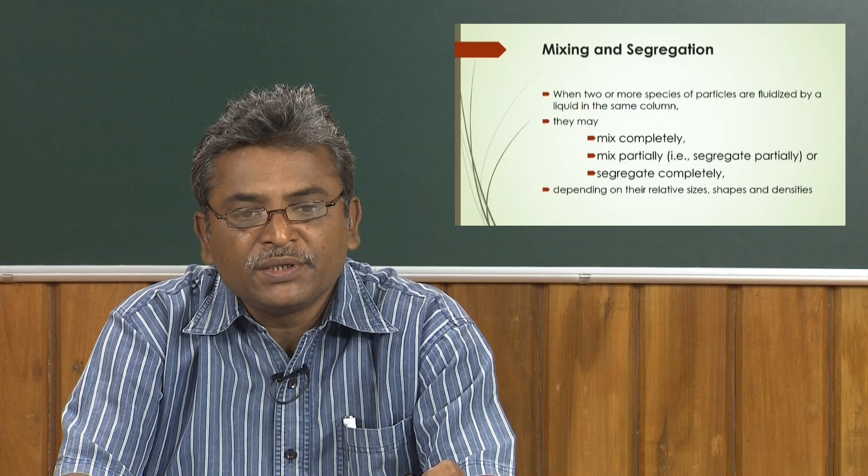So, when two or more species of particles are in fluidized condition, the mixing may be complete or partial, or the segregation may be complete, depending on the relative size, shapes and densities. And the segregation of the solids in liquid solid fluidization depends on the pressure gradient. In gas solid systems the pressure gradient will be lower; the pressure gradients will be higher in liquid solid systems, because here the frictional resistance at the wall will be more in case of liquid. So, the extent of segregation of the particles in liquid solid fluidized systems depends on the pressure gradient.

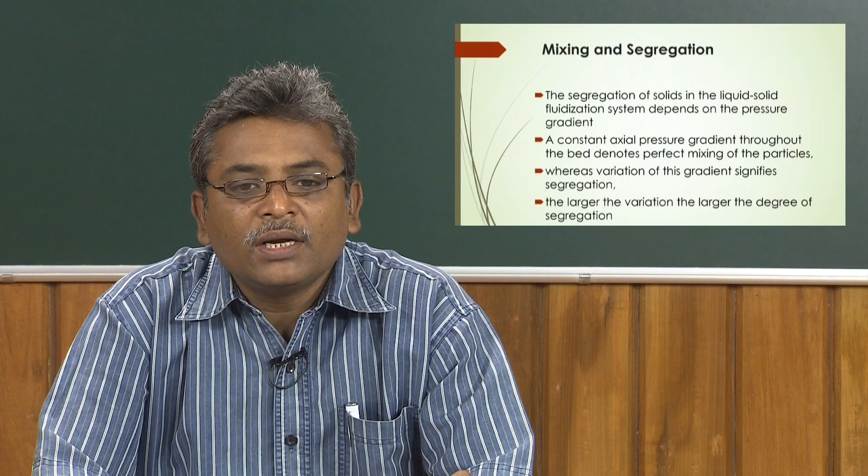And of course, a constant axial pressure gradient throughout the bed denotes perfect mixing of the particles, whereas variation of this gradient signifies segregation. The larger the variation of pressure drop or pressure gradient, the larger the degree of segregation in the fluidized bed in case of liquid solid system.

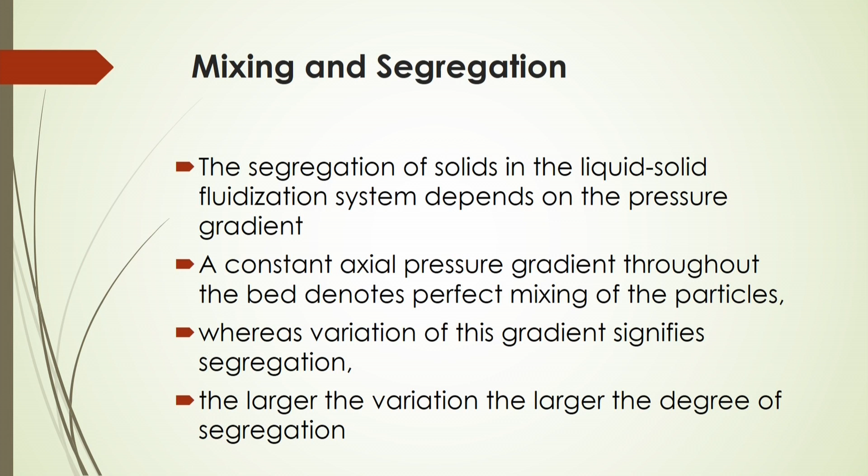So, first you have to calculate what should be the pressure gradient at a certain height of that fluidized bed. Up to that distance you have to calculate what should be the pressure gradient, and this pressure gradient of course will be the frictional pressure gradient. And also you have to calculate what should be the frictional pressure gradient for the whole fluidized medium. So, in that case the ratio will be represented by this m_z by M.

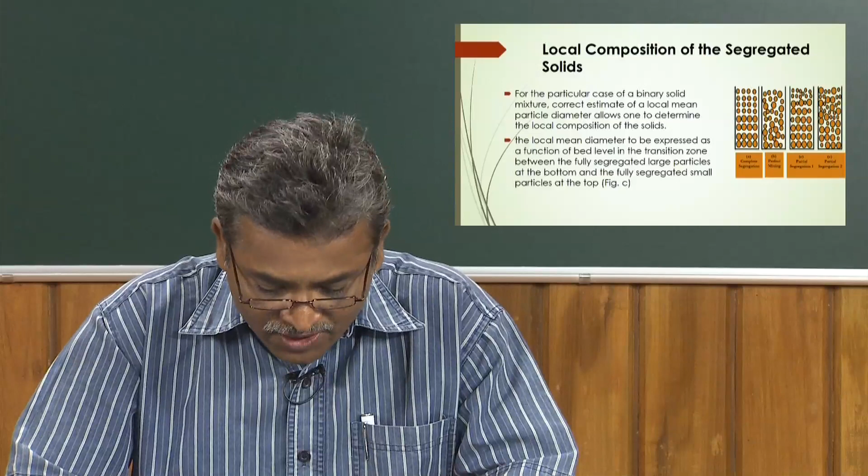We have already discussed in the gas-solid fluidization system that there will be two portions of the fluidized bed, bottom and top. The smaller particles will be segregated to the top, and at the bottom the coarser particles will be deposited as segregated solids. So, in these slides you will see how the solid particles are segregated from bottom to top. In figure A there is complete segregation.

See how the smaller particles are segregated from the coarser particles: the smaller particles are separated at the top region of this fluidized bed, whereas the coarser particles are deposited in the lower part. Whereas, if there is perfect mixing, smaller and coarser particles will be distributed throughout the column, and there will be no segregation.

In that case, smaller and coarser particles may not be separated into the bottom and top portions; smaller particles may also be at the bottom, and coarser particles at the top. So, the segregation depends on the mixing characteristics.

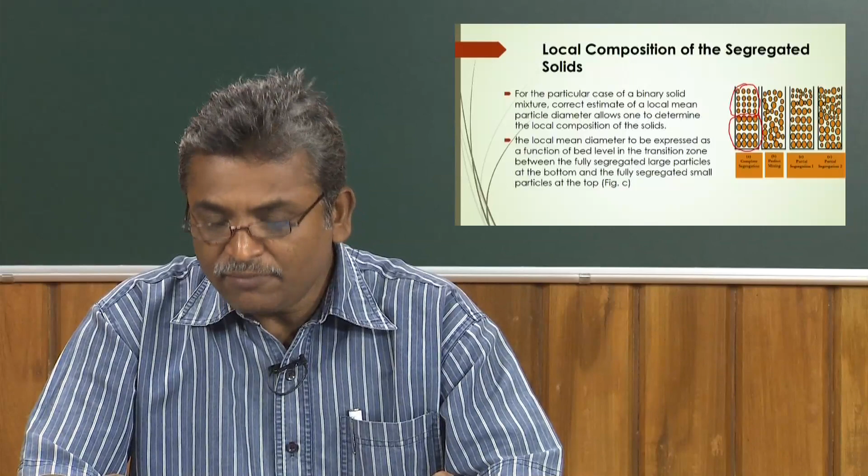Now, if higher mixing or higher flow rate is maintained inside the bed, you will not get 100% segregation. At a certain gas flow rate there will be complete mixing, where small and coarser particles are distributed throughout the column, and their concentrations are equally distributed, so you have to maintain a certain gas flow rate and pressure distribution.

With perfect mixing, the pressure gradient will not change along the height of the fluidized bed, whereas for complete segregation, the bottom part, a dense region of coarser particles, will show a higher pressure drop, while at the top portion the finer particles have higher porosity.

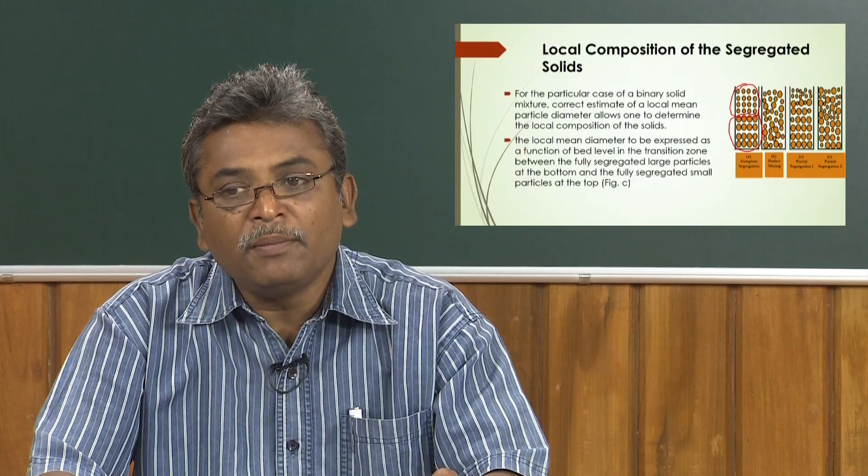In that case, that friction or pressure drop will be less compared to the perfect mixing there. Whereas in partial segregation, you will see that a very small amount of smaller particles will be residing at the bottom of this fluidized bed, whereas the maximum portion of the coarser particles will be residing on the bottom side, and a very small amount of coarser particles will be depositing at the top portion. So in partial segregation, some dilute concentration of the solid particles will be mixed in the lower part with the coarser particles.

In partial segregation, as you see in figure C, if you are increasing the flow rate and the energy distribution is so high, and also if you change the viscosity of the liquid, using a higher or lower viscous liquid, then you will see that there may again be some extent of mixing of the coarser and finer particles in the fluidized bed, and then the partial segregation will be there to some extent relative to figure C.

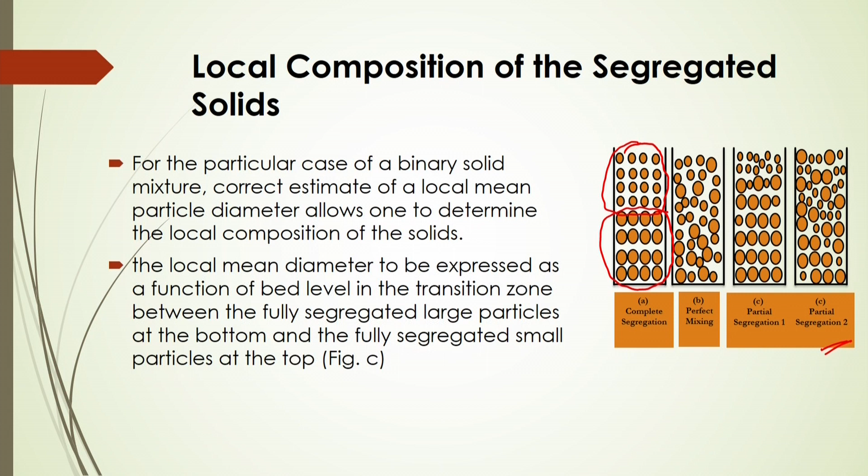So, very interestingly, whenever partial or complete segregation is there inside the bed, the local mean diameter will change across this column, and it can be expressed as a function of the bed level in the transition zone between the fully segregated large particles at the bottom and the fully segregated small particles at the top. So you have to know how the local composition of these solids will change based on the flow rate of the fluidized bed, and what extent of segregation can be obtained by this phenomenon.

And you can determine the local mean diameter using the axial voidage profile. During complete or partial segregation, the local voidage will change. At the top there may be higher voidage, whereas at the bottom there may be lower voidage. So, based on this axial voidage profile, Di Felice et al. 1987 suggested an empirical equation for calculating the local mean axial voidage by knowing the local mean diameter from this segregation phenomenon.

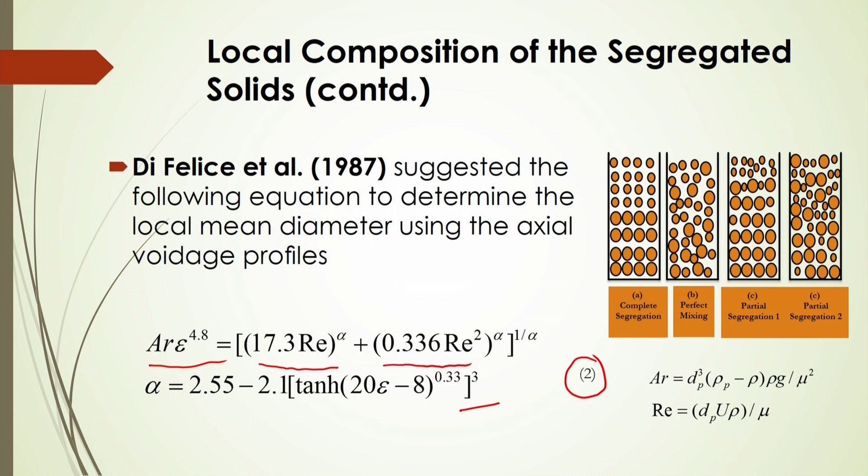So once you substitute alpha here, the porosity equation will be represented by equation 2, and by solving this nonlinear equation for porosity while changing the velocity, the particle density, the liquid density, and other variables, you will be able to calculate the porosity at different levels. And the local composition of the segregated solids will also vary along the axis of this fluidized bed.

So, irrespective of the degree of segregation or mixing, the overall bed expands as simply the sum of the individual species, each acting independently of the other, per Epstein et al. 1981. So, irrespective of the degree of segregation or mixing, how much the overall bed expands based on the voidage inside the bed depends on the number of individual species, and each species acts independently of the other.

So this 1 minus epsilon means the volume of the solids inside the bed, which depends on the local or overall volumetric concentration in the liquid of particle species I. So, if the concentration of particle species I is C I, then it will be C I by C T divided by 1 minus epsilon I, and if you sum these up for the n number of species of different particles inside the bed, then you will be able to calculate the overall bed expansion based on the concentration of particle species I.

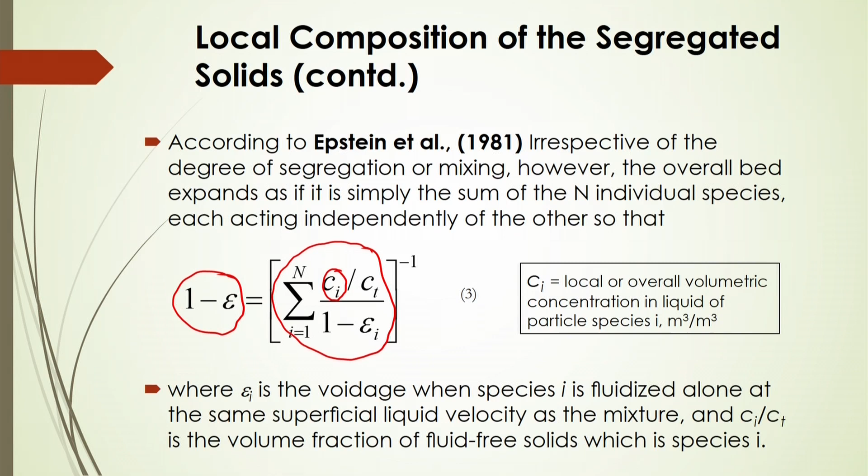And epsilon I is the voidage when species I is fluidized alone at the same superficial liquid velocity as the mixture, and C I by C T, given in equation number 3 here, is the volume fraction of the fluid-free solids for species I.

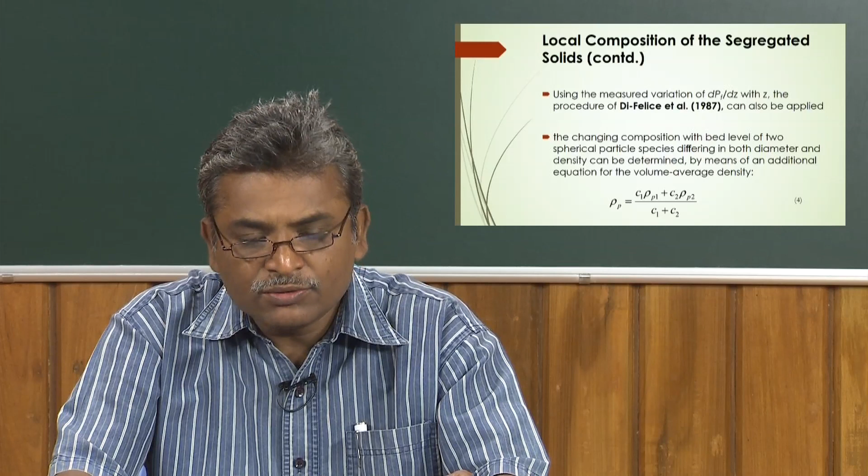Now, using the measured variation of the frictional pressure gradient with height of the column, the method procedure given by Di Felice et al. 1987 can also be applied here by changing the composition with bed level of two spherical particle species, and those species will of course differ in both diameter and density. So, if the spherical particle species differ in size and density, then you can calculate the density of the particles by means of an additional equation of the volume average density.

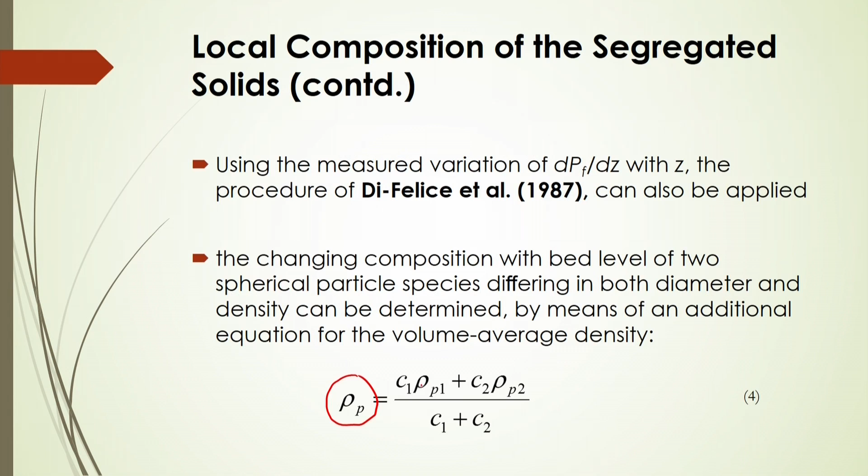So, this average density of the particles inside the bed will be equal to C 1 rho P 1 plus C 2 rho P 2 by C 1 plus C 2. So, here you can calculate the volume average density like this by equation 4.

Now, what are the phenomena involved in particle mixing and segregation? In the case of a size difference alone, the larger particles will always separate to some degree below the smaller under the following conditions. So, size difference is one condition, and bulk circulation or hydrodynamic instability. So, the larger particles separate to some degree below the smaller unless the size difference is small enough.

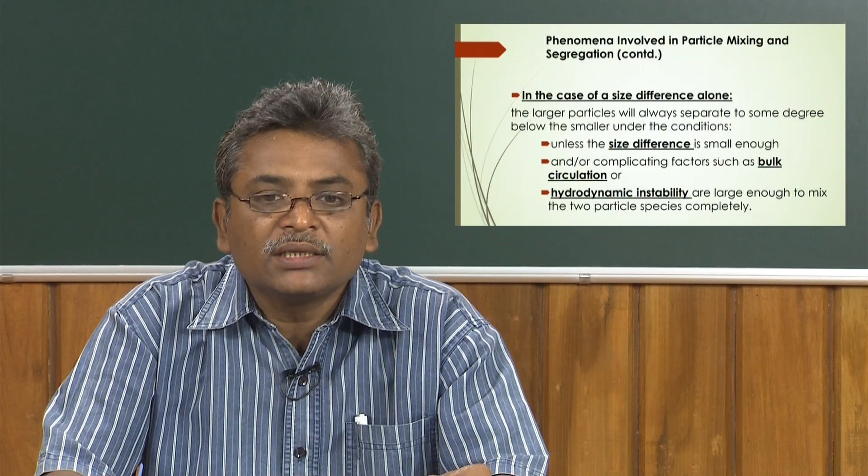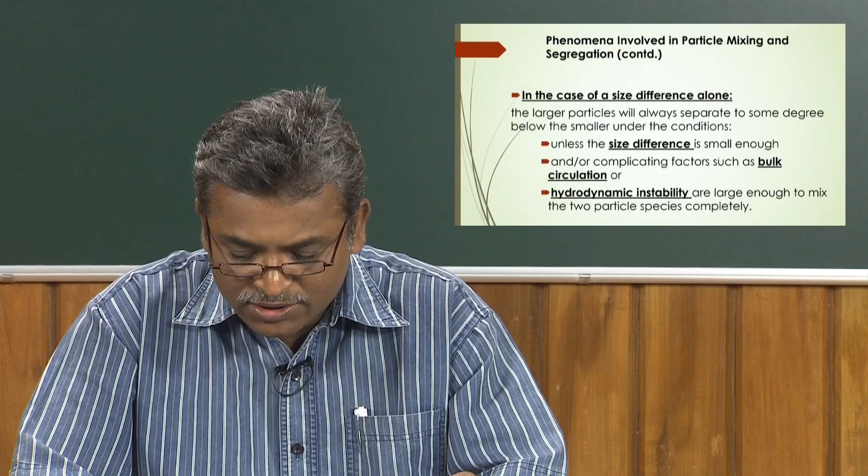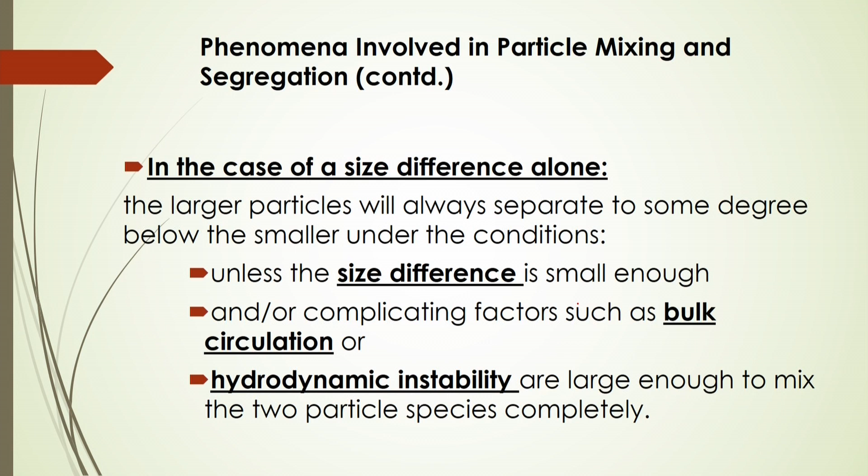And it is also seen that complicating factors such as bulk circulation will govern the degree of segregation based on the size difference. Also, there will of course be hydrodynamic instability; the flow pattern inside the bed may change, and because of that the segregation pattern and the mixing will also change. And hydrodynamic instabilities may be large enough to mix the two particle species completely in the bed.

Now, if there is a shape difference, what will happen? Sometimes particles of different shape will be inside the bed. The species with the larger magnitude of the product phi dp, where phi is the sphericity and dp is the particle diameter, will generally segregate below. And if there is a particle density difference in the same direction as that of phi dp in the previous case, the segregation will be accentuated.

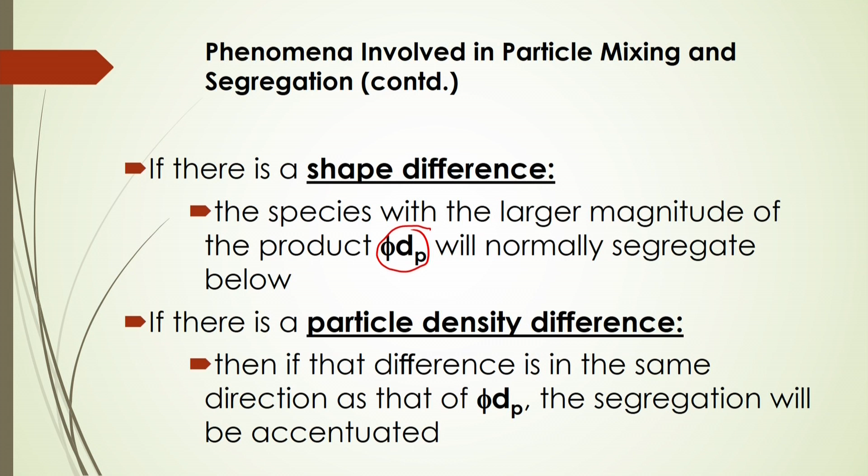And the phenomena involved in particle mixing and segregation also depend on the density difference of the particles and the voidage inside the bed. If the density difference is in the opposite direction, then depending on the magnitude of this difference, the segregation may be attenuated throughout the entire voidage range as the liquid velocity is increased. It may sometimes reverse over the entire voidage range, or it may be reversed at the lower voidage and attenuated at the higher, depending on the fluid density.

The last situation is the interesting bed inversion phenomenon. So, sometimes the bed will invert its segregation of the particles inside it. That totally depends on the diameter, the flow rate, and the fluid properties of the system.

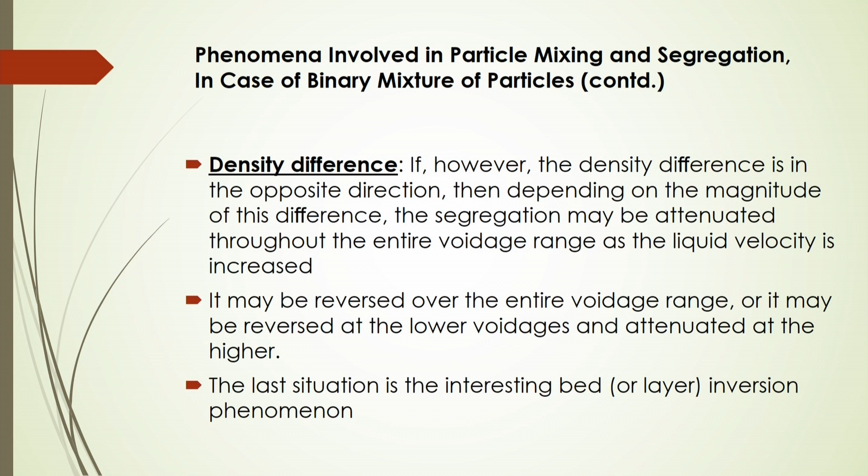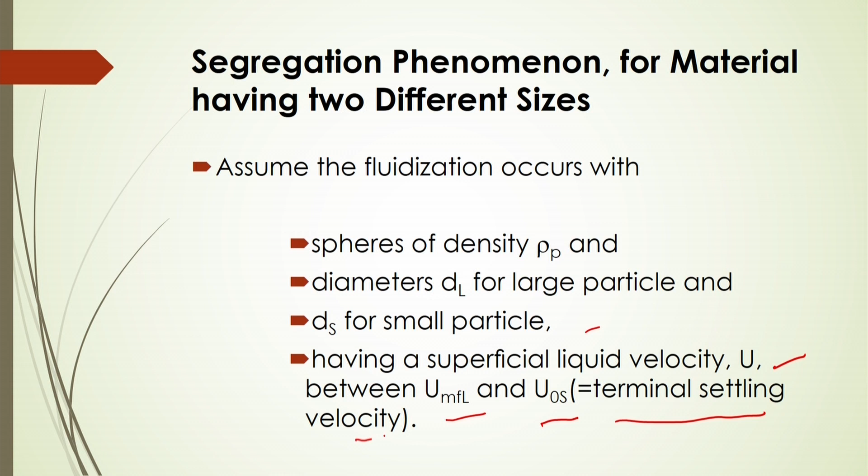Now, how can this segregation phenomenon for material having two different sizes be quantified? Let us consider fluidization of spheres of density rho p with diameter dl for large particles and diameter ds for small particles, having a superficial liquid velocity u between umf L and u 0 s. u 0 is the terminal settling velocity for the particle of smaller size.

And in the absence of smaller particles, the fluidized bed suspension density is calculated based on equation 5 here. In this case, the fluidized bed suspension density will be equal to rho p, the density of the particles, into 1 minus epsilon L.

1 minus epsilon L is nothing but the volume fraction of the larger particles there, and then density of the liquid into epsilon L is the porosity of this only liquid volume fraction there. And in the absence of larger particles, the suspension density will be given as rho p into 1 minus epsilon s plus rho into epsilon s here.

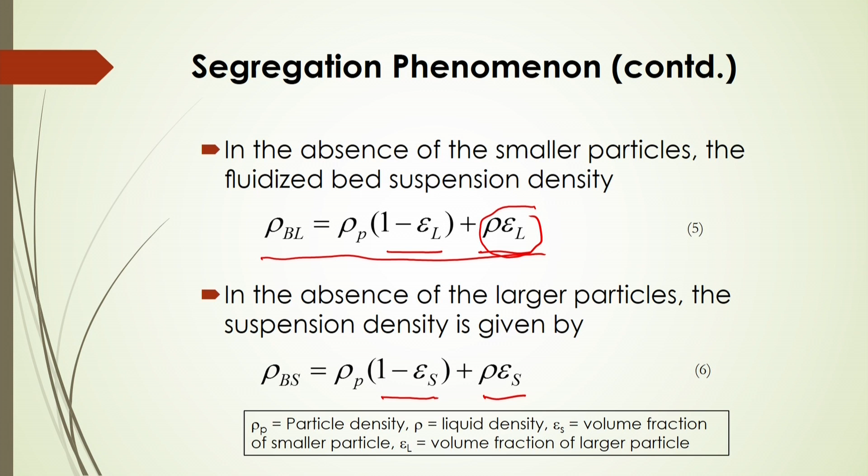So, epsilon L and epsilon s are the volume fractions of the larger particles and smaller particles in the bed. If you know these volume fractions, then what should be the suspension density based on the larger and smaller particles? Rho p is the particle density, rho is the liquid density, epsilon s is the volume fraction of smaller particles, epsilon L is the volume fraction of larger particles, by which you will be able to calculate the fluidized bed suspension density by equations 5 and 6 shown in the slides.

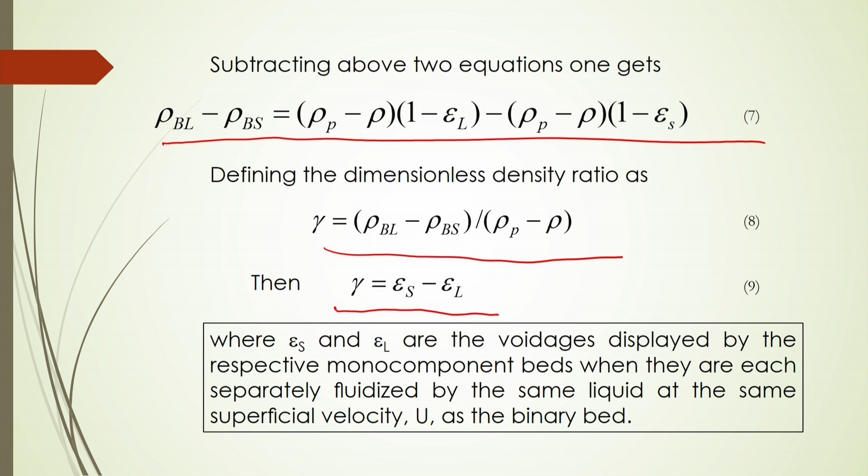Now, if you subtract equations 5 and 6, you can simplify it as equation 7, and defining the dimensionless density ratio by equation 8, you can represent this as gamma is equal to epsilon s minus epsilon L, where epsilon s and epsilon L are the voidages displayed by the respective monocomponent beds when they are each separately fluidized by the same liquid at the same superficial velocity u as the binary particle bed mixture.

As per Richardson–Zaki 1954, they developed a correlation for this gamma applied for the monocomponent beds. They have given epsilon s is equal to epsilon L into (dL by ds) to the power (3 minus m) by mn, where m and n are parameters that depend on the other properties of the fluid. The index n in equations 10 and 11 can be calculated by equation 12: (4.8 minus n) by (n minus 2.4) equals 0.043 into Archimedes number to the power 0.57.

Now, n can be calculated from equation 12, whereas m depends on the fluid flow condition, whether high velocity or low velocity, that means the regime: sometimes laminar, the Stokes regime, and sometimes the Newtonian regime. So, that varies based on the fluid flow condition.

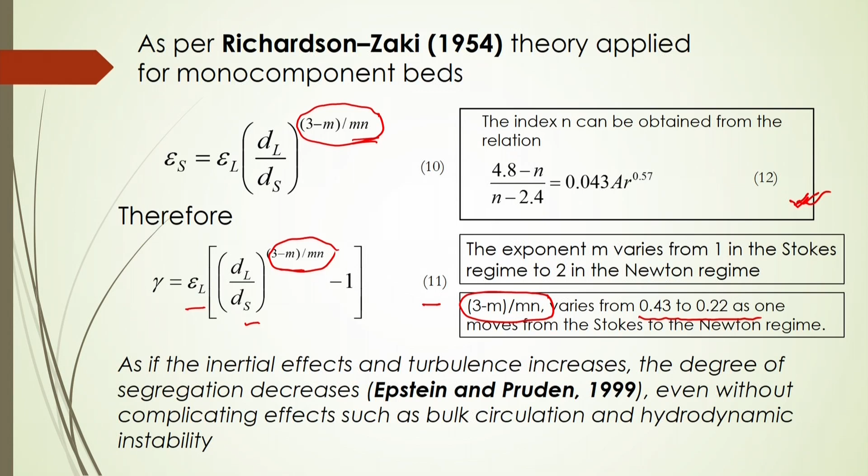As the inertial effects and turbulence increase, the degree of segregation decreases, as given by Epstein and Pruden 1999 in their article. Even without complicating effects such as bulk circulation and hydrodynamic instability, inertia effects and turbulence will change, and because of this the segregation and its degree will be affected.

Now, a qualitative measure of the degree of segregation is given by Epstein and Pruden, and the value of gamma may function as a crude qualitative measure of particle segregation as follows. If gamma is less than 0.015, there will be little segregation and good mixing, as shown in figure B. If gamma is within 0.015 to 0.045, as in figure D, partial segregation with no interface between layers will happen.

Whereas, if gamma is between 0.045 and 0.1, there will be segregation with a fuzzy interface and some intermixing, as shown in figure C in the slides. And if gamma is greater than 0.1, there will be clear-cut segregation with a sharp interface and little intermixing, as shown in figure A in the slides.

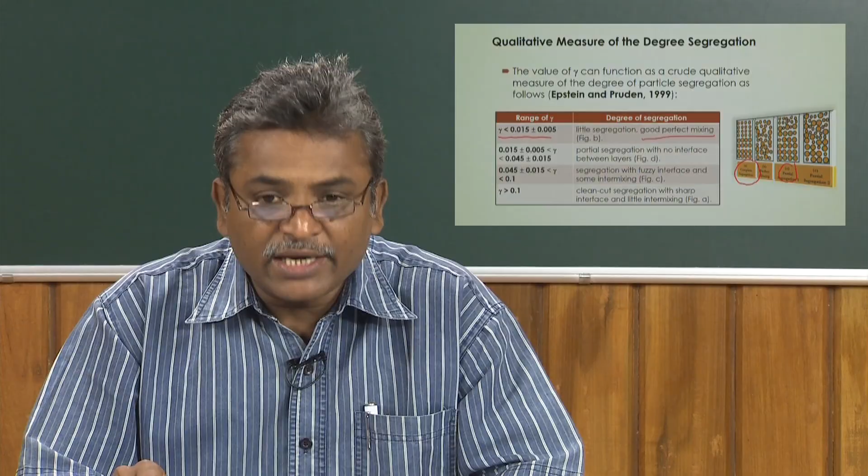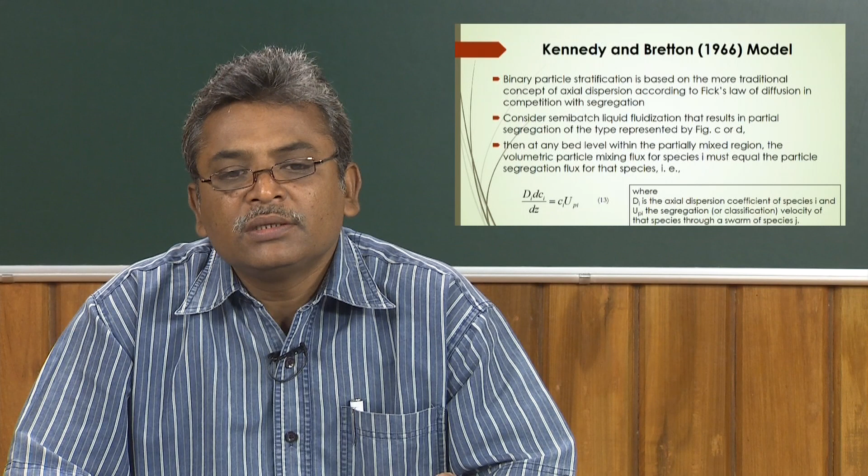Now, as per their model, if you consider a semi-batch liquid fluidization that results in partial segregation of the type represented in figure C and D in these slides, then at any bed level within the partially mixed region, the volumetric particle mixing flux for the species I must be equal to the particle segregation flux for that species. So, in that case equation 13 will be useful to interpret the axial dispersion inside the bed.

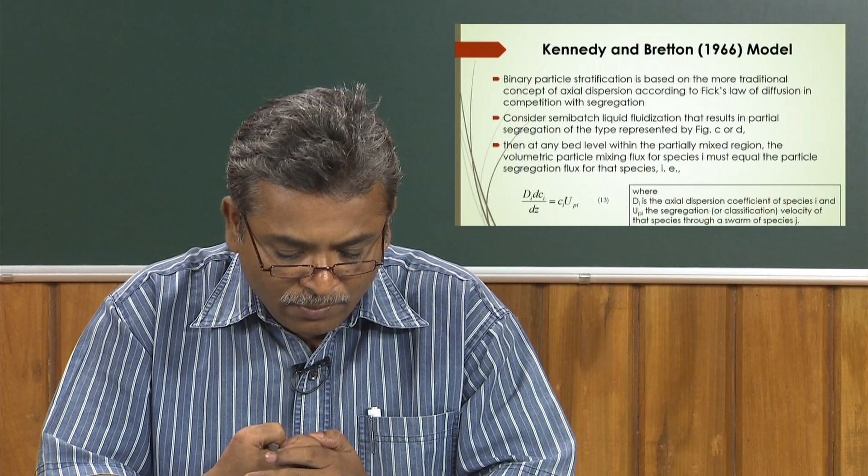Now, they have concluded that, as per Fick's law of diffusion, they have given equation 13, by which the concentration of that species with respect to z at steady state will depend on the particle flow rate there, or you can say the segregation velocity of the species through a swarm of species j in the mixture. So, in that case this proportionality constant will be expressed by the axial dispersion coefficient. So, based on their model this equation 13 can be explained here.

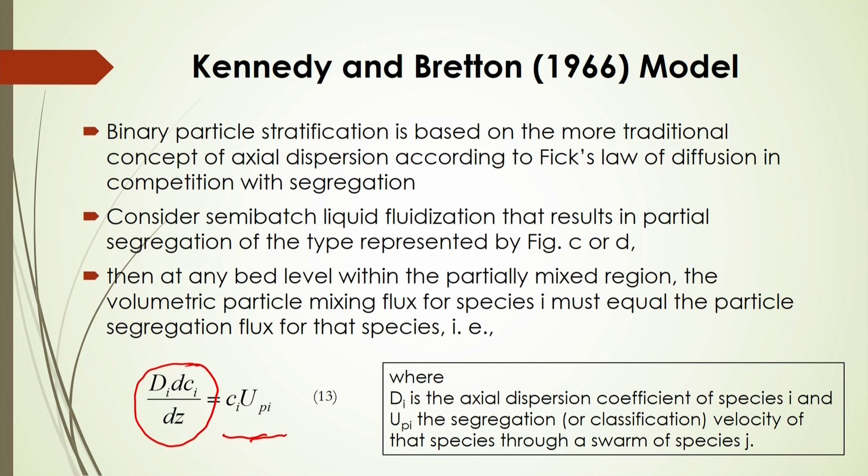So, D_I into dC_I by dz will be equal to C_I into u_pI. C_I is the proportionality constant, D_I is called the axial dispersion coefficient of the species I, and u_p here is the segregation or classification velocity of that species in the bed.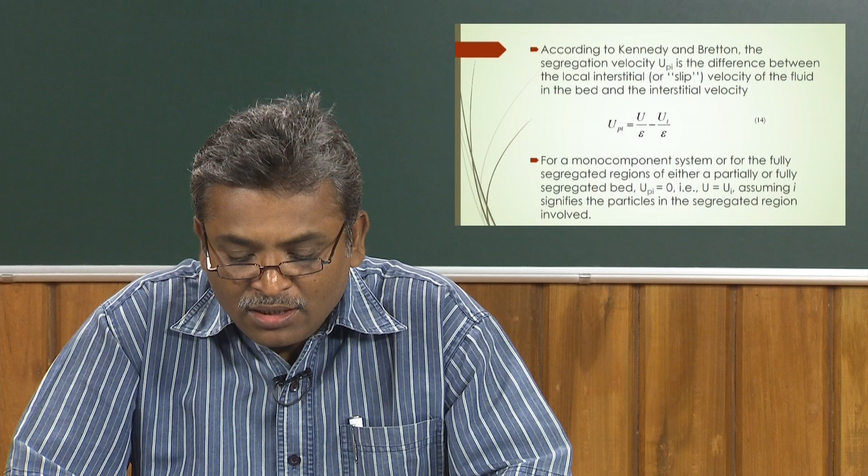Now, according to their model, the segregation velocity u_pI can be expressed by the difference between the local interstitial velocities, which will be equal to u by epsilon minus u_I by epsilon. So, u is the gas velocity and epsilon is the porosity. So, u by epsilon is the axial velocity of the gas, whereas in u_I by epsilon, u_I is the species segregation velocity and epsilon is the void inside the bed. So, based on this you can calculate the slip velocity, or relative segregation velocity, in terms of this axial or interstitial velocity.

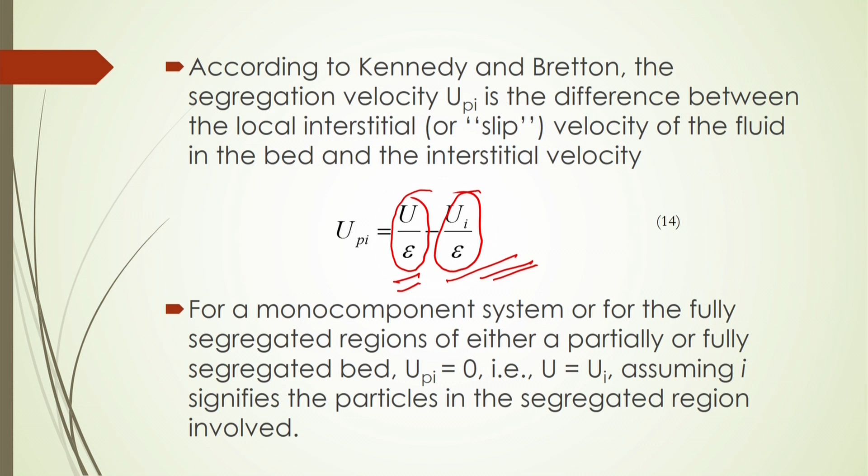So, for a monocomponent system or for the fully segregated region of either a partially or fully segregated bed, the u_pI value should be equal to 0, whereas u will be equal to u_I, that means the gas velocity will be equal to that individual species velocity. In that case you will see particles in the segregated regions of the bed.

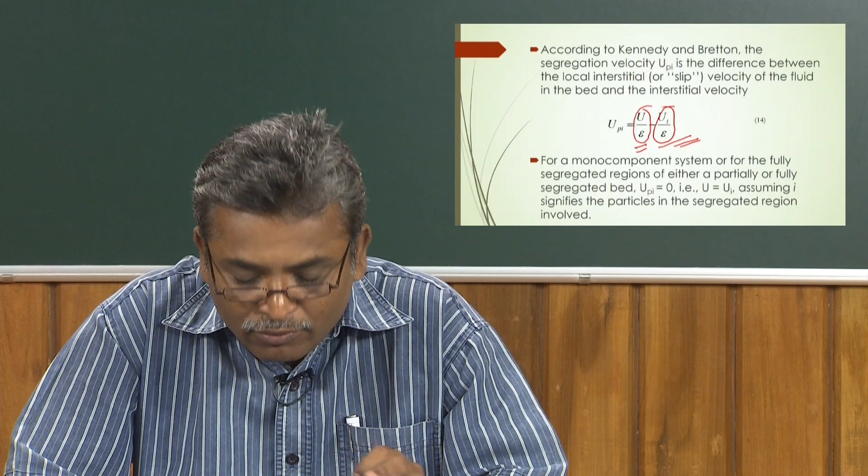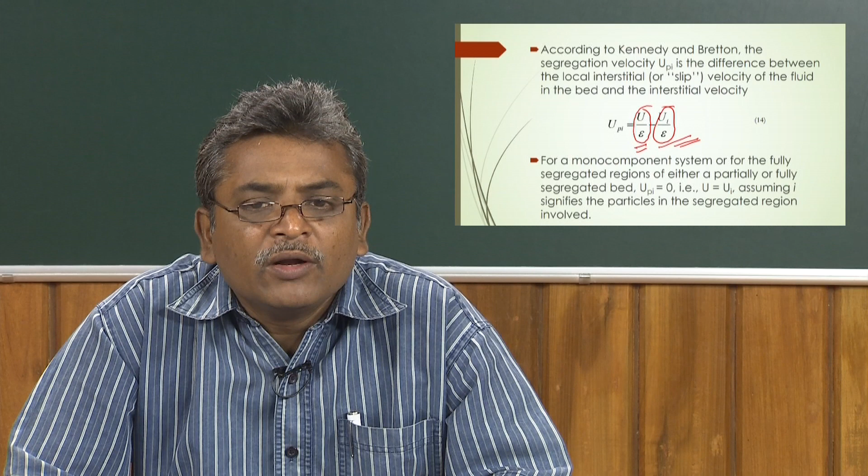So, in this case you will be expressing how that slip velocity will change the extent or degree of segregation, whether it is a partially or fully segregated bed or not. So, first you have to calculate the local slip velocity of that segregated particle. And substituting this u_I value in equation number 13, you will have the equation expressed by equation 15.

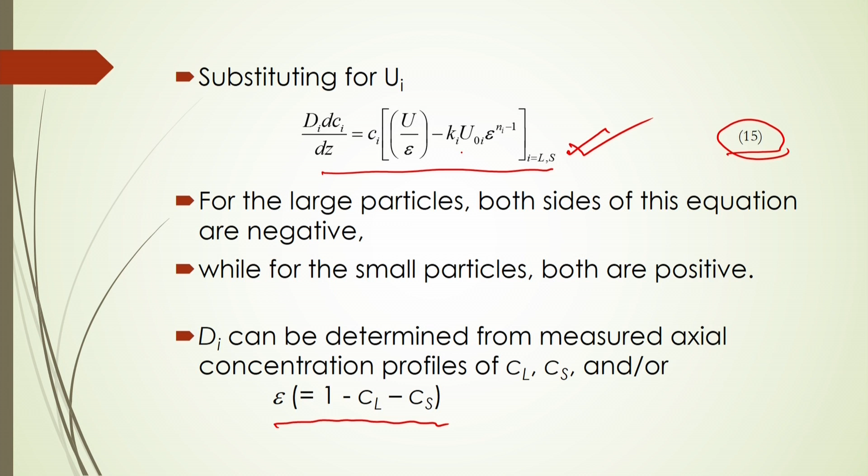And in this case for the large particles both sides of this equation are negative, whereas for the small particles both may be positive. So, D_I can be determined from the measured axial concentration profiles of C_L and C_S, with epsilon equal to 1 minus C_L minus C_S. So, based on equation 15, you will be able to calculate this axial dispersion coefficient D_I just by plotting the gradient of the concentration with u over epsilon inside the bed.

Now, Juma and Richardson 1983 have also given another equation to calculate the segregation velocity along the axis of the fluidized bed, and they have given this equation: u p I is equal to a I plus b I into z. This a I and b I are parameters which are to be experimentally determined. Here I means L and S, that means large and smaller particles.

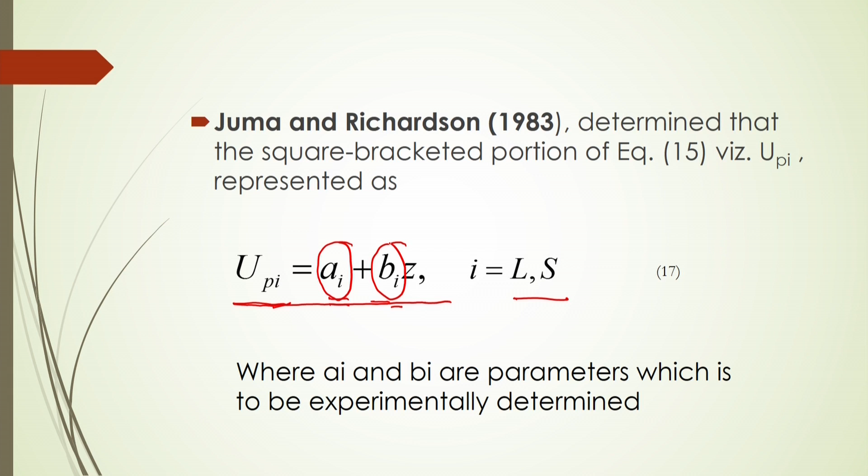So, for the larger particles, u p L will be equal to a L plus b L into z, and for smaller particles u p S is equal to a S plus b S into z. Now, if you are able to find out experimentally how this u p for large and smaller particles changes along z, then you can mathematically express the segregation velocity for large and smaller particles by equation number 17.

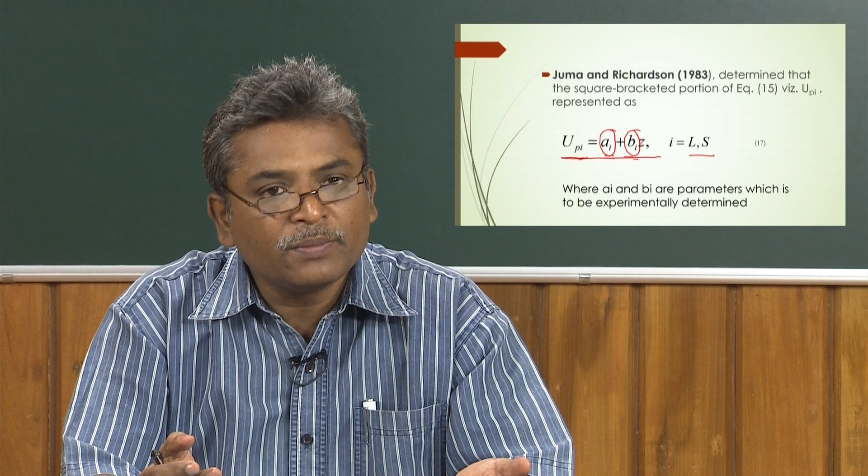From the experimental data you will be able to find out the parameters a I and b I for equation 17. Once you know these parameters, you can say what the predicted value of u p I will be for any operating conditions. Once you know this predicted segregation velocity for the large and smaller particles by equation 17, and substitute it, you will be able to find out the axial dispersion of the larger and smaller particles inside the bed for this binary mixture.

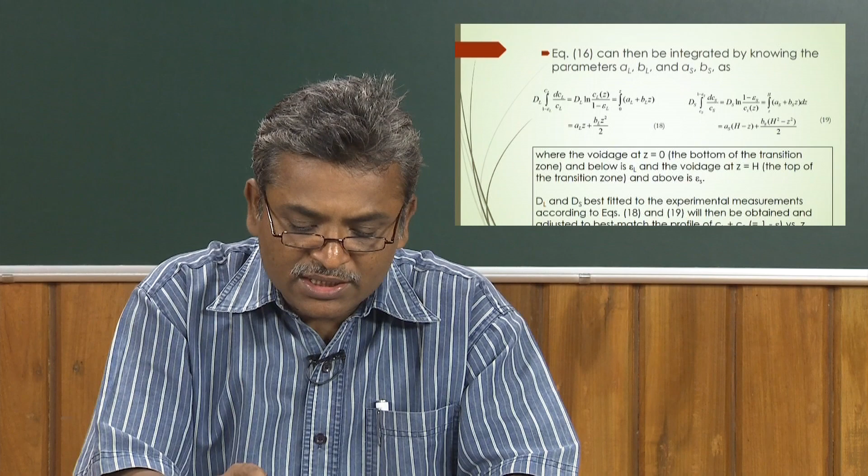Equation 16 can then be integrated by knowing the parameters a L, b L and a S, b S, and substituting you will get this type of equation, from which the dispersion coefficient for each individual component, the larger and smaller particles, can be calculated. Here it is important that the voidage at z equal to 0, the bottom of the transition zone and below, is epsilon L, and the voidage at the top of the transition zone and above is epsilon S.

Now, D L and D S are best fitted to the experimental measurements according to equations 18 and 19. You can obtain the value and adjust it to best match the profile of C L and C S, which equals 1 minus epsilon, versus the length Z of the fluidized bed. So from equations 18 and 19 you will be able to calculate the extent of dispersion of the large and smaller particles and how it changes along Z.

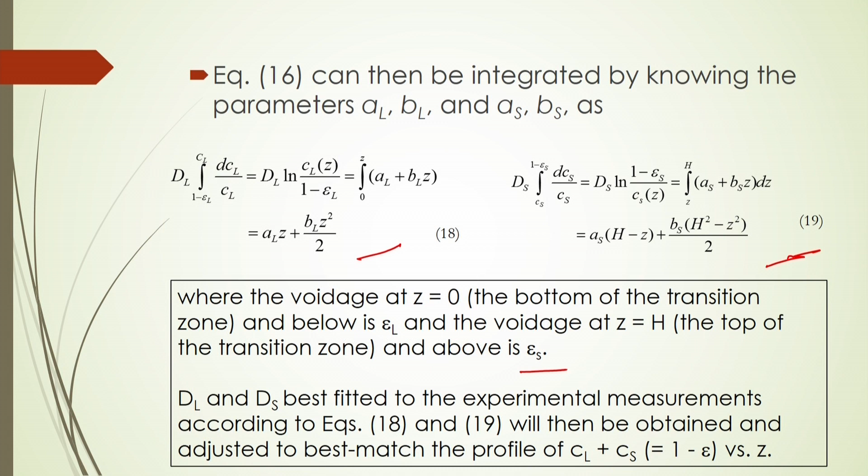Now, u p I varies linearly with C I, from 0 in a monocomponent bed of I particles, in which epsilon equals epsilon I and C I equals 1 minus epsilon I, to u p I 0 in a monocomponent bed of j particles, in which epsilon equals epsilon j and C I equals 0. So u p I is equal to u p I 0 into 1 minus C I by 1 minus epsilon I.

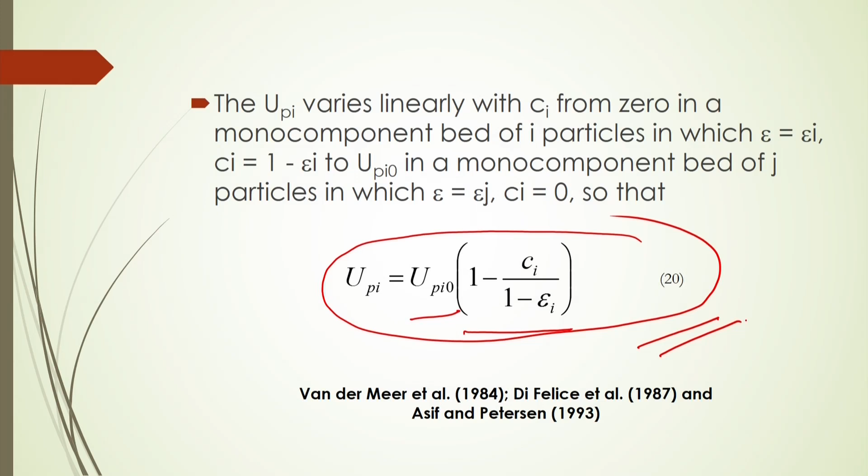This relation has been given by Van der Meer et al. 1984 and Di Felice et al. 1987. Also Asif and Petersen 1993 studied how the segregation velocity for the large and smaller particles changes with concentration, and they also suggested the same type of relationship with the concentration, which is expressed in equation number 20.

Now, substituting equation number 20 into equation 13, taking I equal to L for larger particles and the upward direction as positive, you will get equation number 21. After simplification of 21 you can express it, and if you integrate it, you can get the mass fraction of the large particles in terms of concentration. Then at Z equal to Z L, you can express this equation to predict the mass concentration of these particles along the axis of the bed.

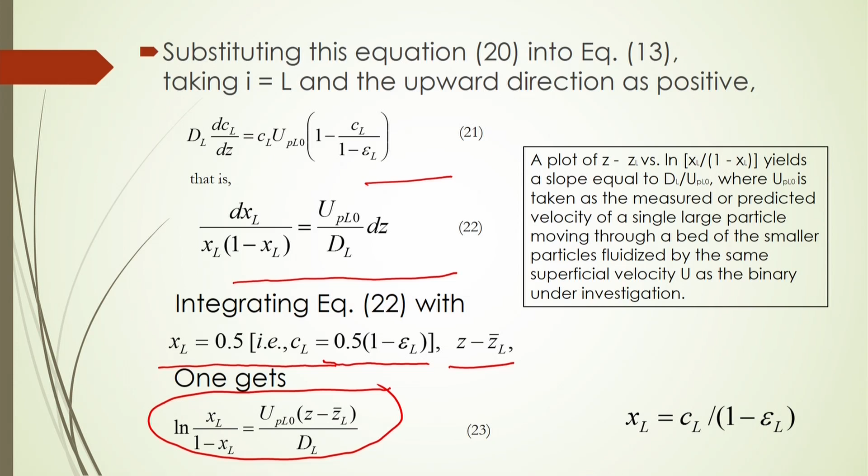Now, from equation number 23, it follows also that XL should be equal to this here, and it will be related to this Peclet number here. This Peclet number is denoted by the axial dispersion coefficient of these large particles. So, if you know the axial dispersion coefficient of the large particles, then you will be able to calculate the mass fraction of the larger particles in the bed, along with Z, that is, Z minus ZL by L.

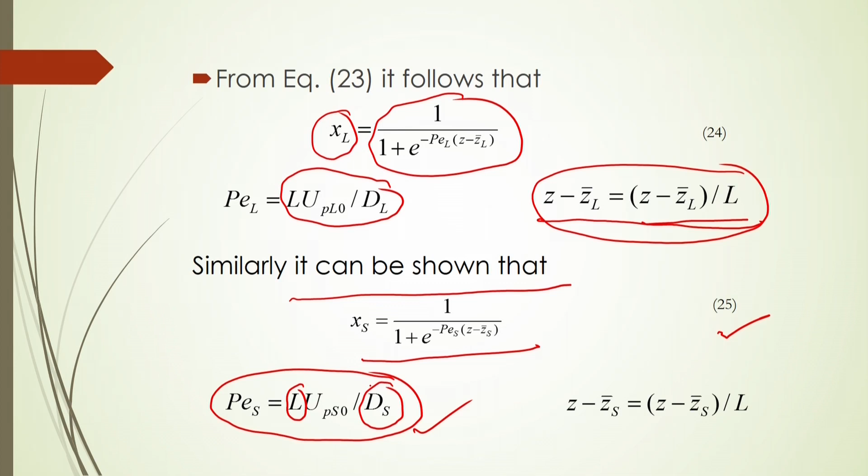Similarly, it can be shown for smaller particles also, XS will be equal to this, by knowing the dispersion coefficient for the smaller particles, which is expressed by this Peclet number in equation number 25, whereas the Peclet number of the small particles is defined by L, the length of the bed, into UPS0, the segregation velocity for these smaller particles, divided by the dispersion coefficient of the smaller particles.

Now, Di Felice et al. 1987 have also correlated CS and CL by the porosity of the smaller and larger particles by equation number 26. And if you substitute CS from equation number 26, then XS can be calculated in terms of XL by equation number 27. So, equation 27 comes after simplification by substituting the concentration profile for the smaller particles in terms of larger particles.

Now, comparing equations 25 and 27, you can simply say that the Peclet number of the large particles will be equal to the Peclet number of the smaller particles in magnitude, but opposite in direction, because the flow of the smaller and larger particles will be in opposite directions. And of course, the length of occupation of the larger particles inside the bed and of the smaller particles should be almost the same. So, at the middle of this fluidized bed, there will be a demarcation of the larger particles and smaller particles.

This happens if the Peclet numbers of the smaller and larger particles are the same, or you can say the dispersion coefficients of the larger and smaller particles are the same in the bed. And this happens only when the concentration of the smaller particles is based on this correlation with the larger particle concentration.

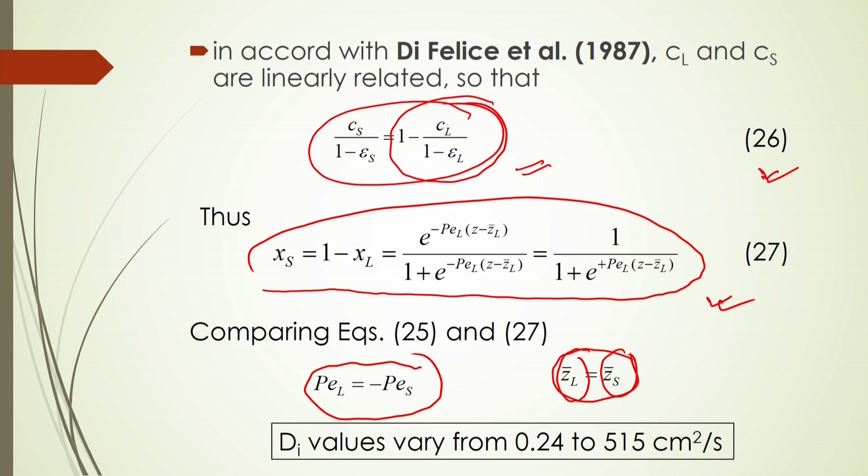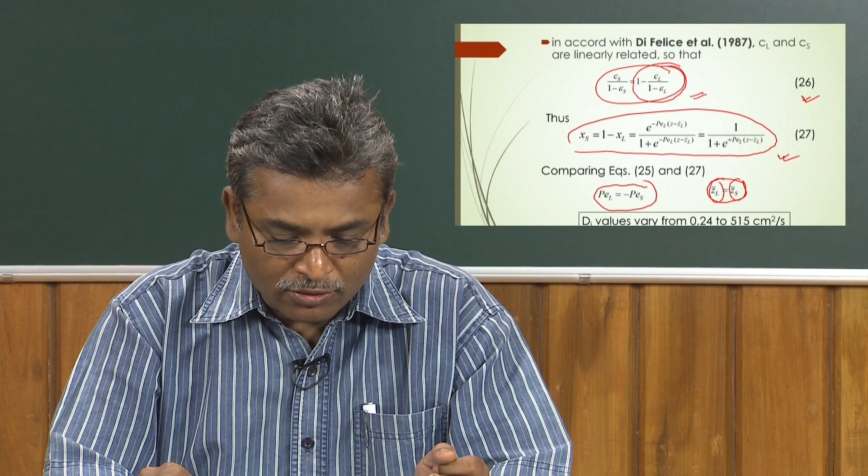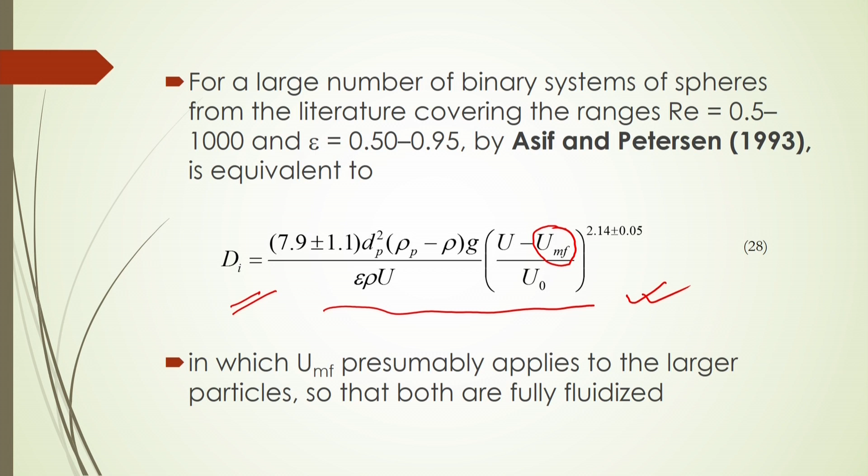So, this is expressed by this equation, which is a function of the velocity, density of the liquid, porosity, the particle diameter, and of course the minimum fluidization velocity, in which UMF presumably applies to the larger particles, so that both are fully fluidized. So, the important point is that UMF should be based on the larger particles. Once you substitute UMF, U and U0, you will be able to calculate the dispersion coefficient of the large or smaller particles inside the bed.

Now, let us see the case of a binary mixture of equal size particles. It is obvious that multi-size particles of fixed density are far more common in industrial situations than particles of uniform size having different densities. In different applications, for example whenever you are grinding, you will not have the same size particles. But for the same size with different densities, the segregation criteria should also be known.

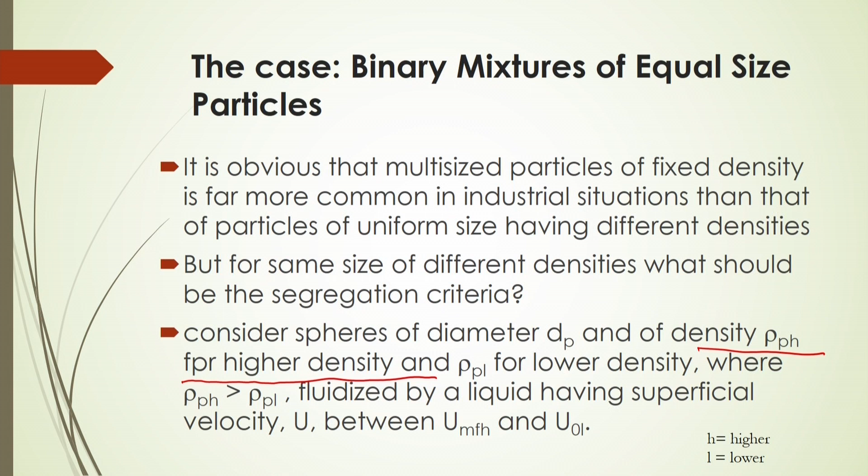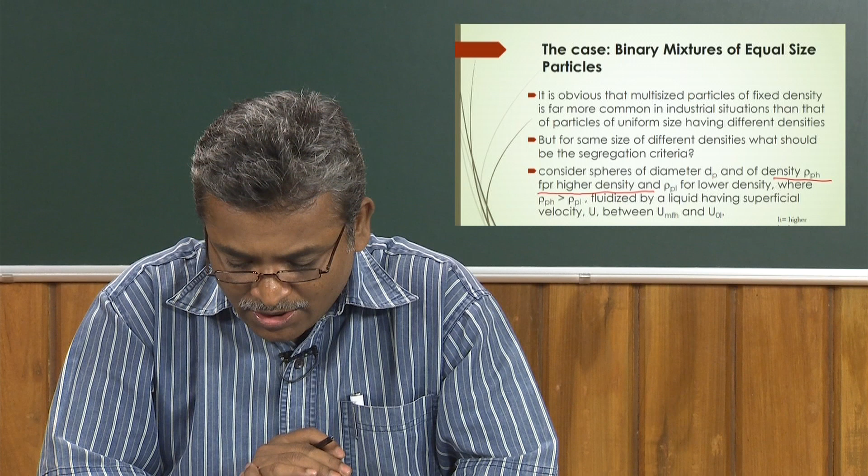Consider spheres of diameter dp and density rho pH for higher density and rho pL for lower density, where rho pH is greater than rho pL, fluidized by liquid having superficial velocity u between UMF,H and U0,L. Then the degree of segregation by particle density can be expressed by equation number 29 given here.

In this case, this rho b h for higher density particles will be expressed by this equation here, and then rho b L to be expressed by this equation. And equation 30 is denoted for the porosity for the higher density particles in terms of the lower density particles inside the bed.

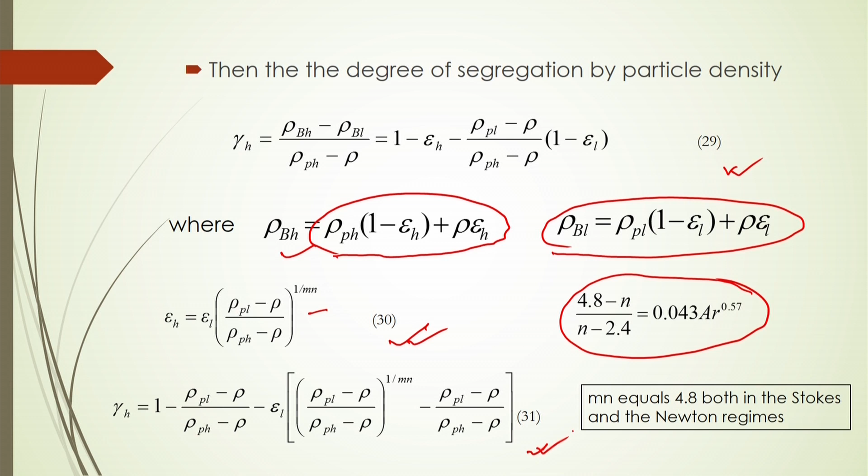And this n, of course, we have already shown how n should be calculated here, and m and n, the value of mn equals 4.8 both in the Stokes and Newtonian regime. So, by equations 29 to 31 you will be able to calculate the degree of segregation by particle density.

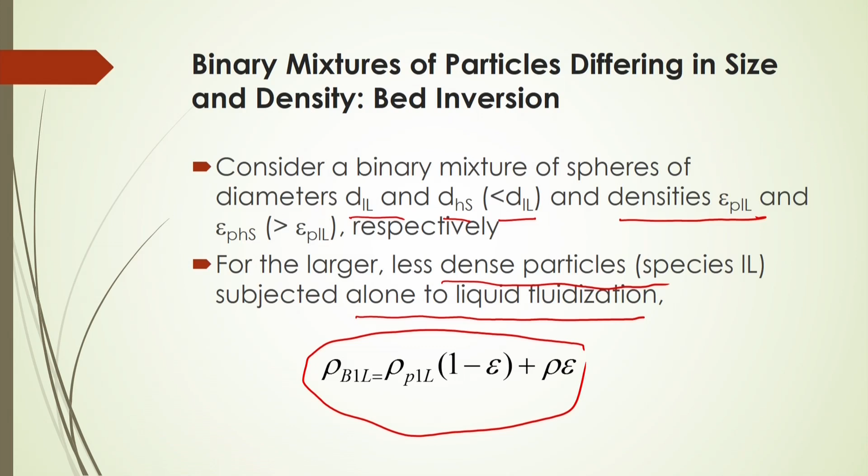Another important point: if you are using a binary mixture of particles differing in size and density, there will be bed inversion. So, consider a binary mixture of spheres of diameter d_lL and d_hS and densities rho_p lL and rho_p hS respectively. Then for the larger, less dense particles in liquid fluidization, rho b lL will be equal to rho p lL into 1 minus epsilon plus rho epsilon.

Similarly, the smaller denser particles can be expressed by this equation, and the reduced bulk density by this equation. Then it will provide the indication of the degree of segregation according to this equation shown in the slides. Now, according to Jean and Fan 1986, the segregation velocity of species hS with respect to species lL will be given by this equation here.

Now, the inversion condition you will get if you take the derivative and set it equal to 0, then d u p hS by d u is equal to 0. So, at this condition there will be inversion. At the inversion velocity the entire bed attains a uniform composition equal to the overall solids composition, that means x lL should be equal to 0.4, and a bulk density equal to rho b b.

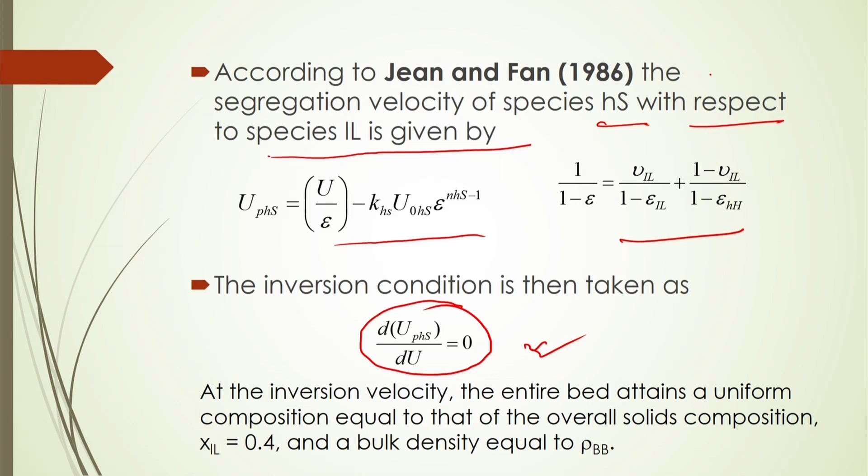More information you can get from the other references given here. So, from this lecture we conclude that we are able to know how segregation and the extent of segregation and mixing happen in a liquid medium, how the dispersion coefficient of larger and smaller particles changes based on the segregation velocity, and how different sizes and densities of the particles in this liquid medium affect the segregation velocity and consequently the dispersion coefficient inside the bed.

And also what inversion case will happen if you know the inversion segregation velocity for individual particles with different densities, and what is the inversion condition. It is very important that when larger and smaller particles are mixed, at a certain velocity the entire bed will attain a uniform composition equal to the overall solid composition. Based on this you will be able to analyze the fluidized bed and the mixing inside the bed based on this segregation phenomena.

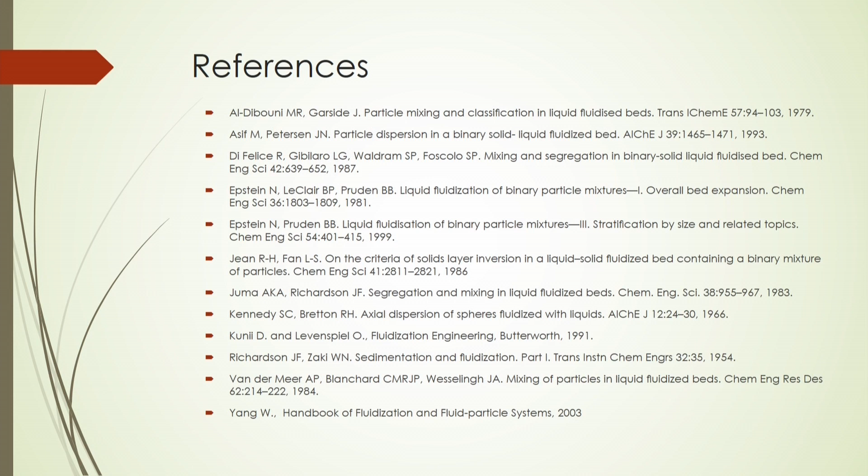That will be called the dispersion phenomena in a 3 phase fluidized bed system. I think this lecture will be helpful for analyzing gas liquid solid systems too, and more references are given here to get more information. In the next lecture we will be considering gas dispersion and interchange in the fluidized bed.